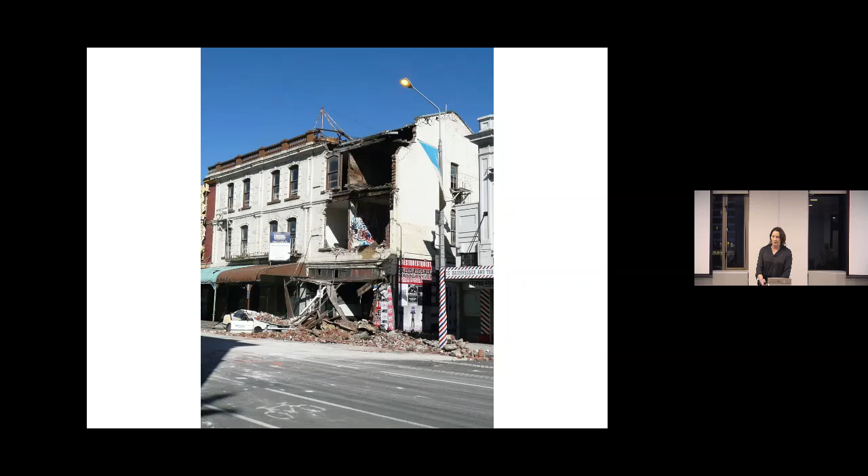When it stopped, my husband, fellow structural engineer, who some of you may know, Craig, his first words to me were, 'There will be buildings down.' As it turned out, the city fared well, and somehow, despite numerous near misses, there were no fatalities.

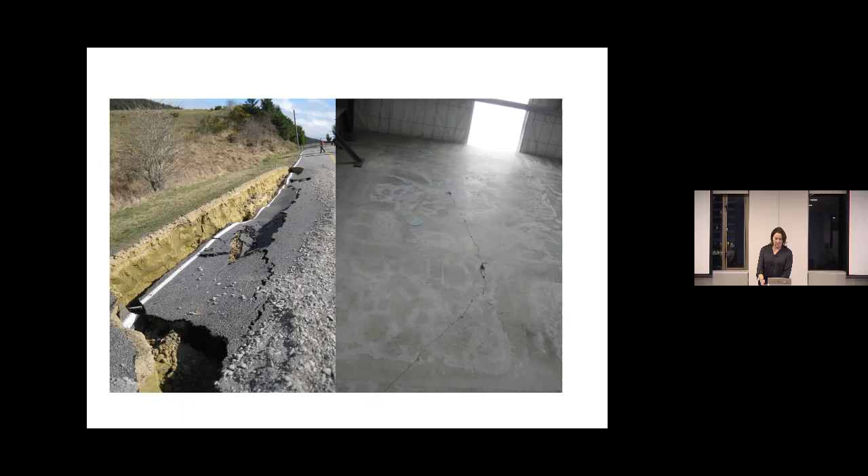I worked on secondment for the Selwyn District Council. I was responsible for the rapid safety assessment of a variety of buildings, including schools, community halls, pubs, shops, industrial buildings, a youth jail, and numerous residential properties, including this house, which was on Telegraph Road. It had the main fault rupture running through the middle of it. You can see it there. It went in the front door and out the back door. And it did pretty well.

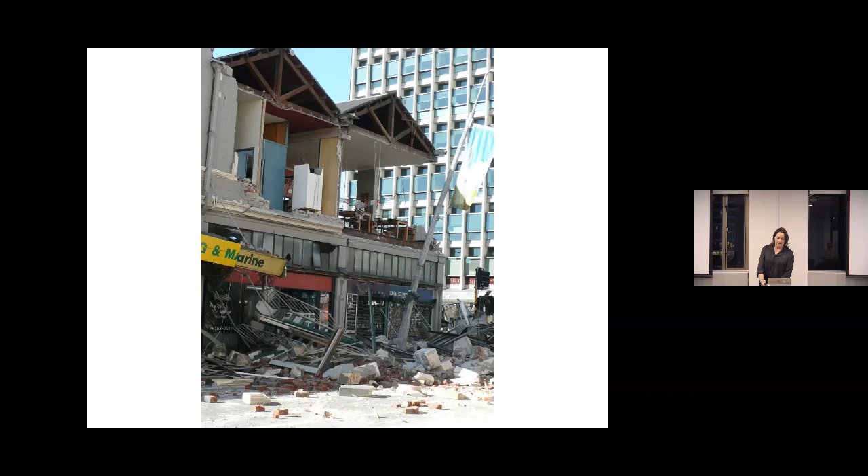Over the following 5 months, engineers were extremely busy, including some of you folk from up north, inspecting buildings and reporting on damaged commercial and residential buildings. The CBD had a large number of 2 to 5 storey unreinforced masonry buildings occupied by offices, retail and hospitality tenancies, only some of which had been seismically secured.

A handful were demolished, some were cordoned off, and some were unfortunately still occupied. I wrote a letter to the editor of the press in October 2010, encouraging people to seismically strengthen unreinforced masonry buildings, to secure their furniture and to get rid of their chimneys, getting ready for future earthquakes.

There was a growing sense of unease in the engineering fraternity as the aftershocks started occurring well away from the main fault line, including most significantly the magnitude 4.9 Boxing Day 2010 aftershock, which was centred under the centre of Christchurch.

At 12:51 p.m. on February the 22nd, 2011, Christchurch suffered an extremely violent magnitude 6.2 earthquake that was only 5 kilometres in depth and very near the CBD. It resulted in the tragic loss of 185 lives.

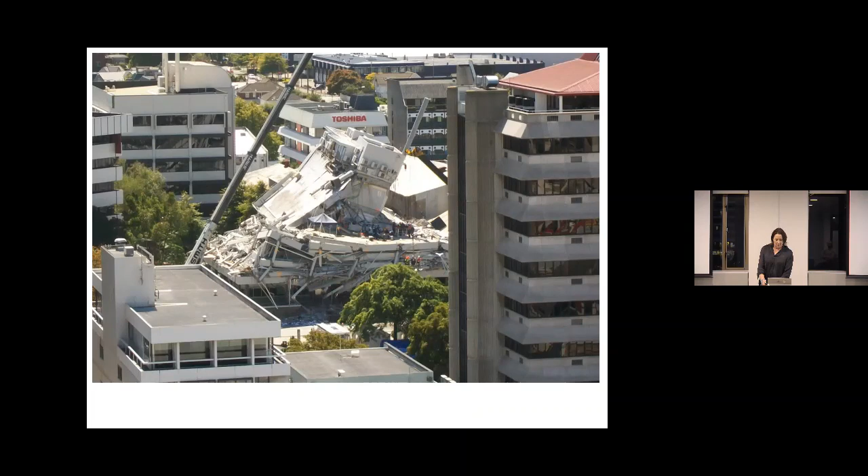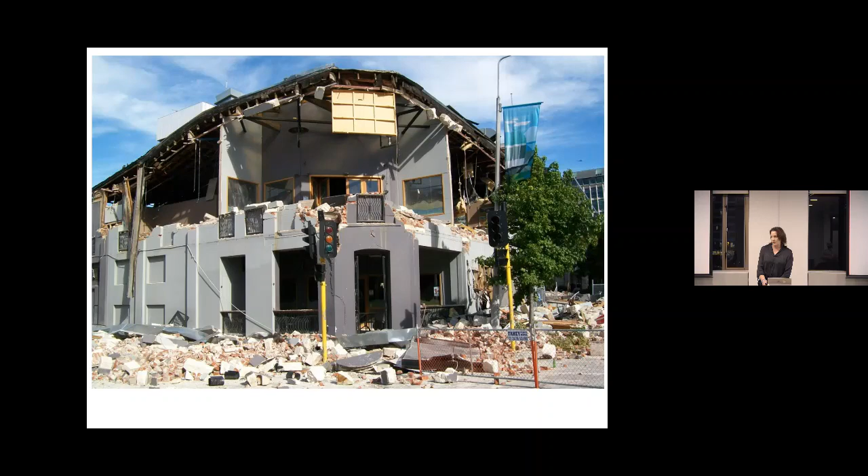Nearly 80% of the buildings in the CBD were eventually demolished. Some because they were uneconomic to repair, others due to generous insurance policies, and some were compulsorily acquired by central government and demolished to suit the new Christchurch rebuild blueprint.

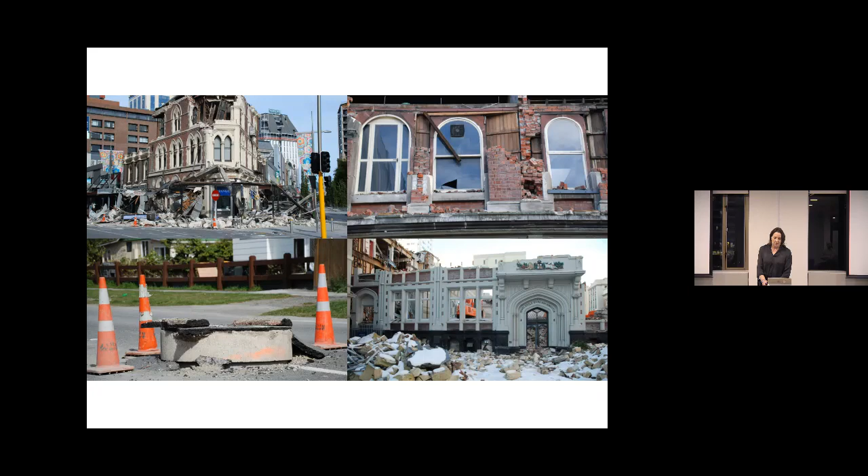The seismic design standards were primarily focused on life safety at ultimate limit state, and rightly so. Ductility in structures dissipates seismic energy, however, it also translates to damage.

With two tragic exceptions, nearly all of the modern buildings in Christchurch did what they were designed to do. In the February earthquake, they preserved life safety.

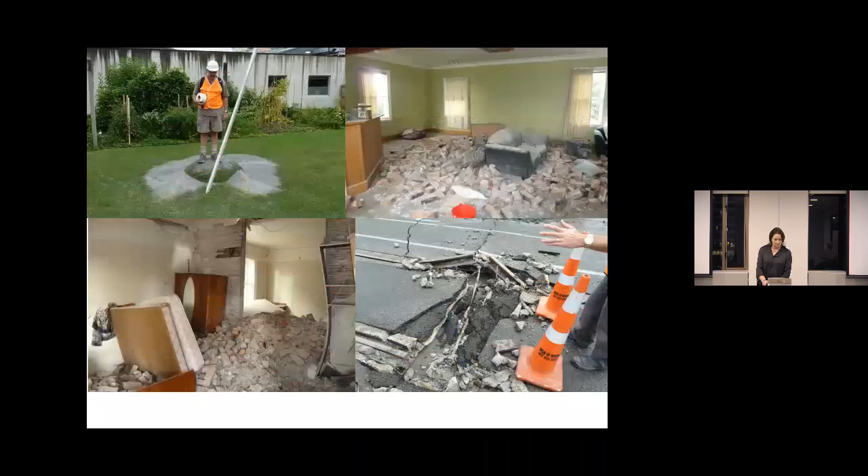Unfortunately, many structures needed to be demolished due to the extent of damage that they suffered. The benefits of being able to save an earthquake damaged building are wide-ranging. It makes economic sense, it saves time, and it's obviously got heritage and environmental benefits. That's my husband Craig there on the sand boil.

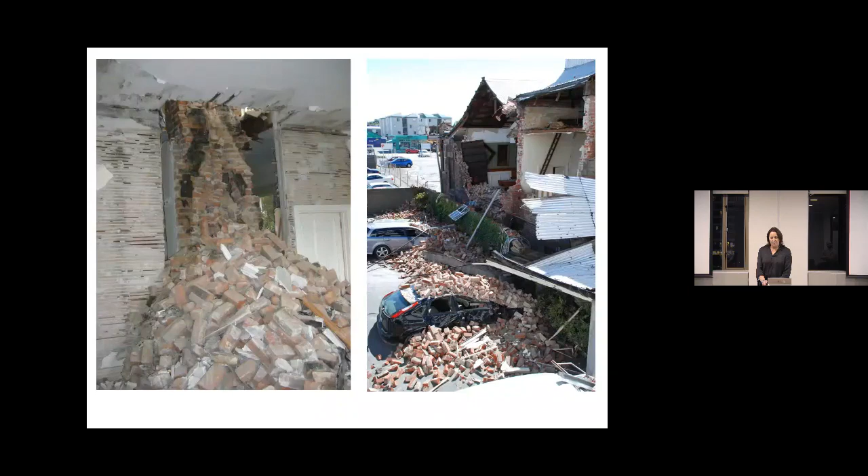I'm going to talk about 5 buildings that were not demolished, but easily could have been. The first of which is Ronald McDonald House.

It's a home away from home for families with sick children being treated down the road at Christchurch Hospital. I was the design engineer for the building in 2002, and it was extended in 2010.

It is a concrete structure, with concrete shear walls, concrete floors, concrete gravity frames, and a basement that is 2 metres in the ground.

It has 3 suspended levels, and the basement slab was designed for seasonal fluctuation of the water table, with standpipes designed so that if the water table rose slowly, the basement would be flooded and the buoyancy pressures would be reacted by the water pushing down on the slab.

Following the September earthquake, the building sustained only cosmetic damage and was able to continue operation.

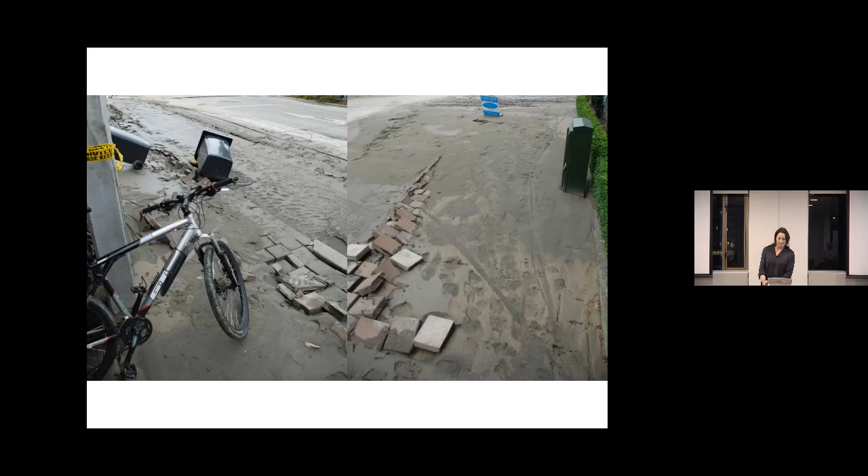The February 22nd earthquake was shallow, and although relatively short in duration, the shaking was extremely violent, and there was widespread liquefaction across Canterbury. The water table effectively rose to ground level instantaneously.

When Craig met with the head trustee of Ronald McDonald House and the original site foreman to inspect the building after the February earthquake, the builder was in tears. He thought the building needed to be demolished because the perimeter had settled.

Craig had a hunch that what had actually happened was hydraulic upheaval due to the rapid water table rise. This was confirmed by a level survey. The basement slab and internal gravity columns had actually been pushed upwards 80 millimetres.

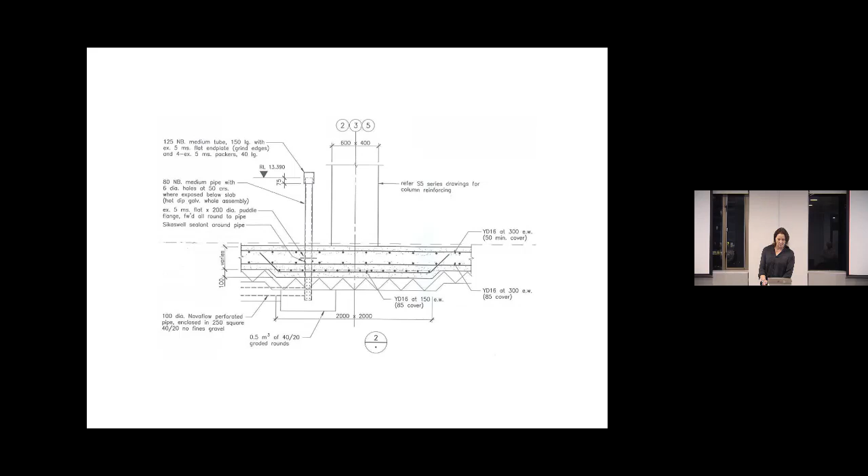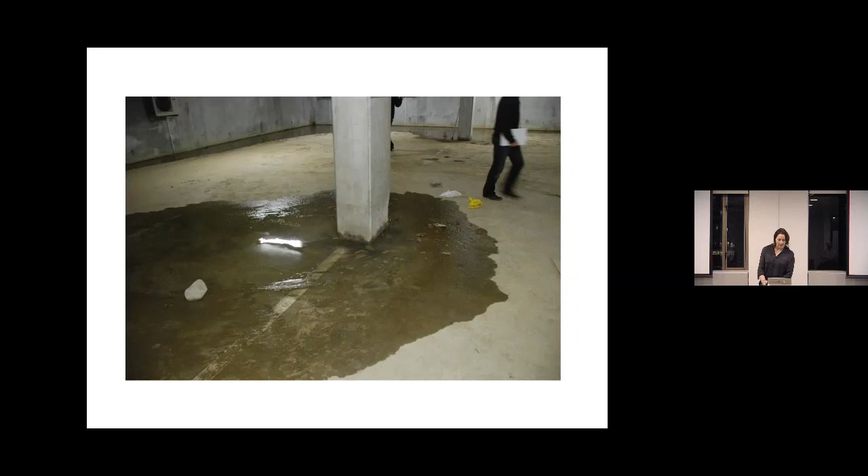You can also see evidence here of punching shear failure from the February earthquake. Water was coming up through the crack that Craig had just had his finger in moments beforehand. So the 300 millimetre thick basement slab had actually punched up.

The interesting thing about Ronald McDonald House is that they were self-insured internationally, so they were highly motivated to get the building fixed so that it could be up and running as soon as possible.

Commencing in December 2011, the repair work began on site. We were still experiencing aftershocks very frequently at this stage, so particular care needed to be given to the temporary works design.

What was done was that the internal gravity frames were propped and the basement slab and the columns were demolished. The internal gravity frames were then gently lowered back down until people upstairs could open and shut the doors again, and a level survey showed that it was level again.

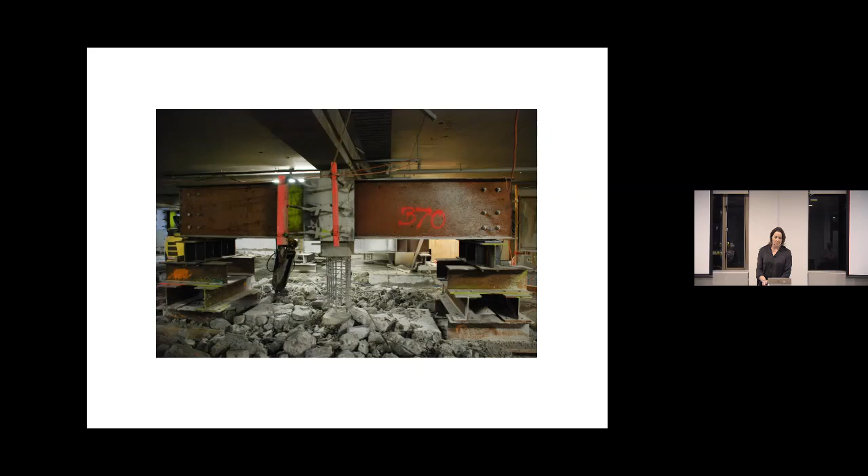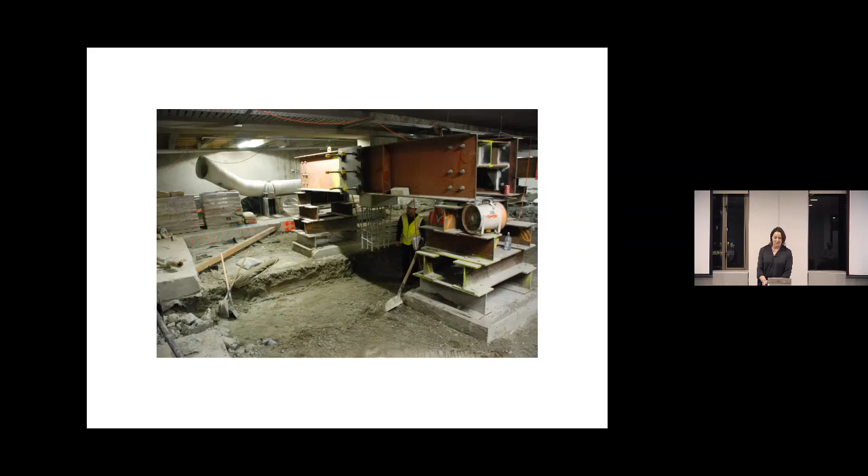Tension anchors were installed in the basement so that the slab would be held down, and a replacement slab was cast along with new columns in the basement.

The success of this project really was that it was completed in only 10 months, and it saved a significant amount of money in terms of not having to rebuild it. The great thing was that the families of the sick children could get back in there a year after the earthquake.

Now, you may recognise this hotel from the news today. It's where the Chiefs stayed on the weekend after they lost to the Crusaders. It's a 14-storey hotel, comprising a basement car park, 3 levels of retail and back of house, and 11 levels of a 4-star hotel on top.

It was constructed between 2008 and 2010 on a challenging site, and at the time of the February earthquake, it was the newest hotel in Christchurch.

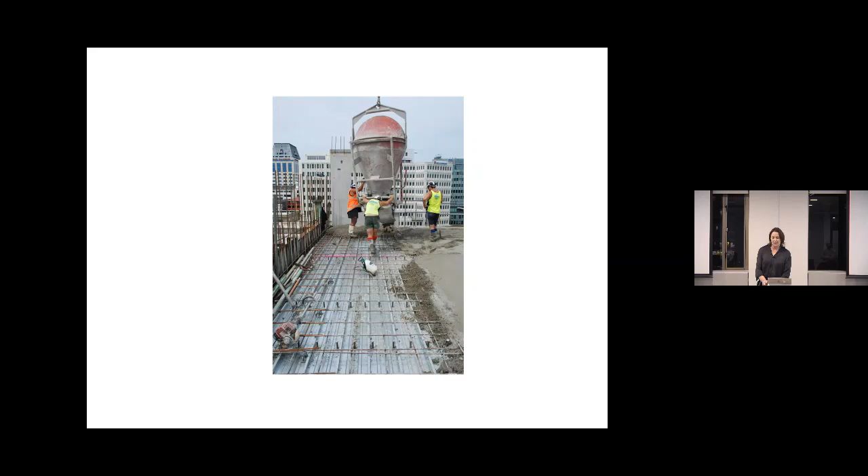The construction consists of an in situ concrete basement, including tension screw piles, a combination of precast and in situ primary shear walls. It has a structural steel gravity frame and tray deck flooring, and it also has precast cladding panels.

This is my sophisticated overview of the seismic structure. We've got a large podium for the bottom 4 storeys, and then on top a tower, and it has 2 shear walls in each direction.

The walls were carefully designed to form plastic hinges about 500 millimetres above the level 4 podium level, so that the level 4 diaphragm wasn't affected.

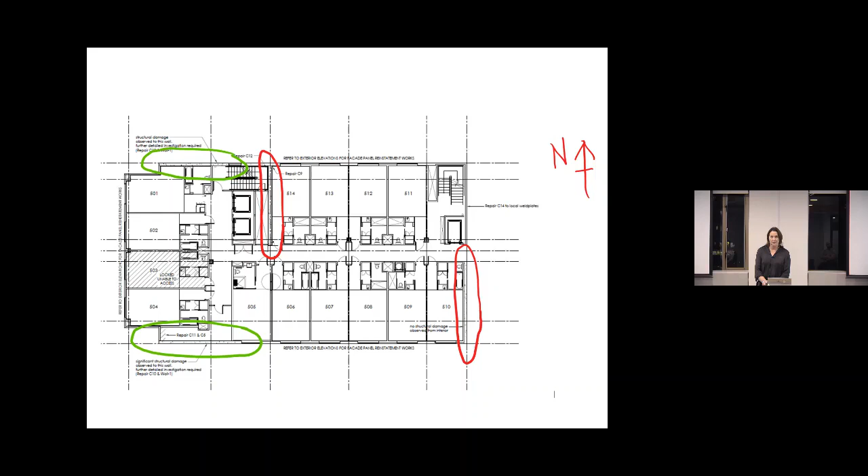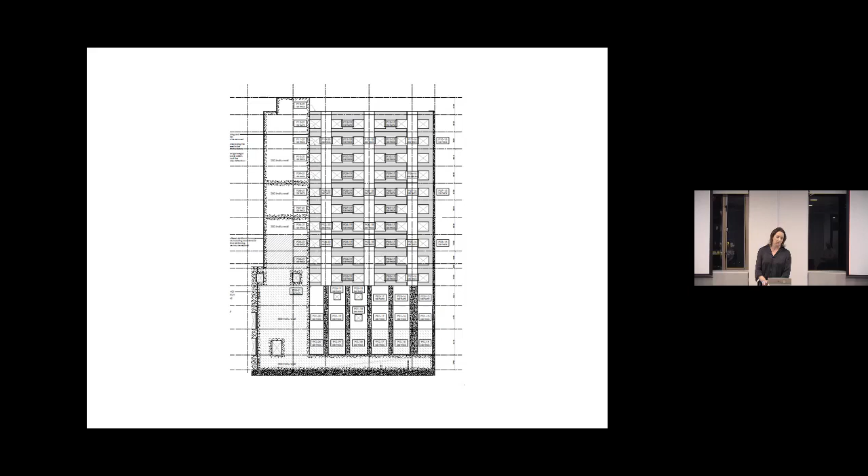It was detailed really carefully and conservatively using requirements for ductility level 6, but only with ductility level 3 loads. The plastic hinge zones have grade 300 vertical reinforcing in them. Everything else was then designed for the overstrength actions of the plastic hinge zones.

And this is what we got on February the 22nd. That's what you call a classic plastic hinge zone, and it formed on the southern shear wall. The northern shear wall was a little bit stiffer because it was a coupled structural wall, so it only suffered minor hairline cracks, and the resulting torsion caused some minor hairline cracking in the 2 north-south walls.

You can see here that the crack pattern was significantly from west to east, and an observation that we made was that it was from the initial nasty pulse of the earthquake. So you'll see that in Colombo Street and Manchester Street, a lot of the damage was on the west side of the road as the facades fell into the street with that initial pulse.

The 125mm thick precast cladding panels suffered spalling damage due to the shaking, causing deflections that were in excess of the design code level event. And the original cladding movement joints had, in some instances, inadvertently been solid dry packed, and some temporary steel brackets had been left in place, which exacerbated the damage.

So the cladding panels were progressively removed and replaced with top-hung floor-to-floor facade panels that incorporated enhanced movement joints at the base. The movement joints were designed for the full current code level requirements, including the post-earthquake increase in loads.

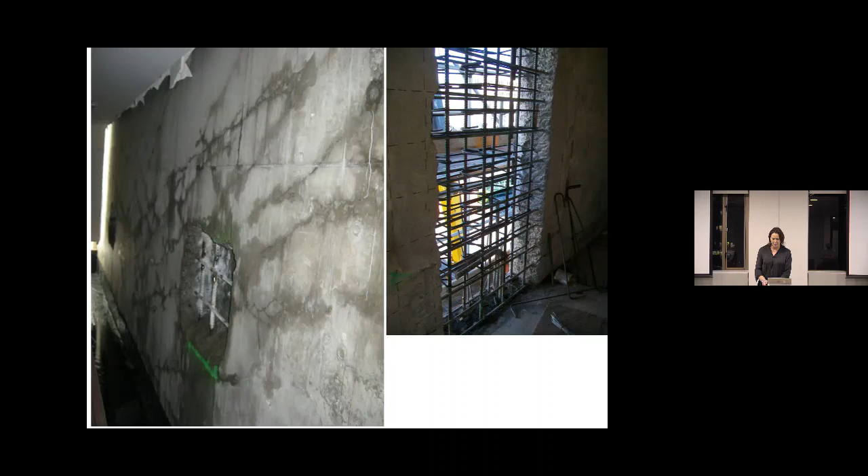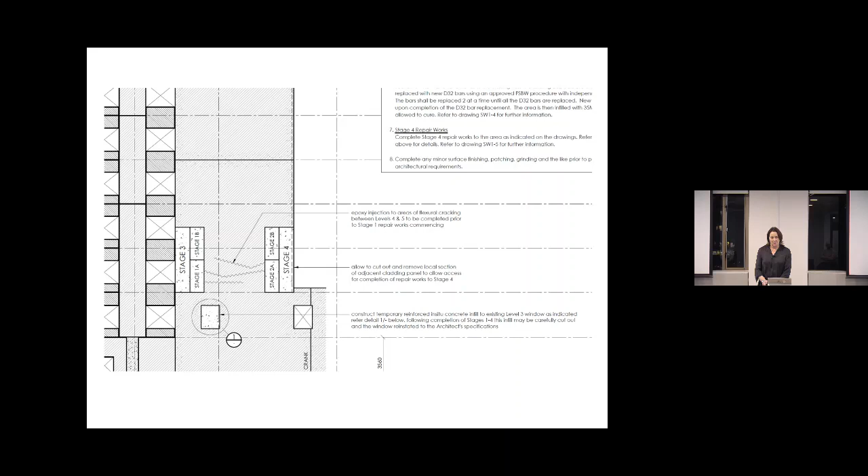Now, as you recall, this was done during the aftershock sequence, so the staging of the work had to be really carefully managed to ensure that adequate temporary strength was provided at all times, and that included infilling some other windows to always have sufficient strength at any stage of the construction. The first step was actually replacing the section of wall 1 metre away from the end of the walls to beef that up in terms of its ductility and confinement, and then the yielded end regions were replaced.

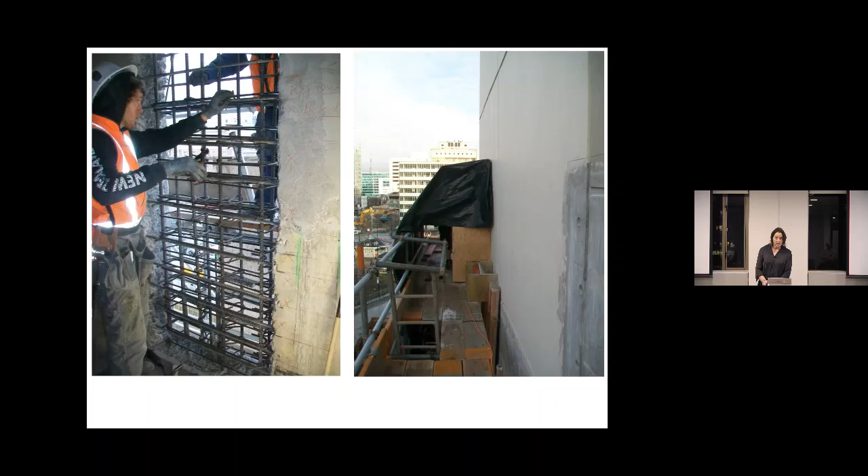We were really lucky because we had Professor Nigel Priestley review the shear wall repair, and he called on his extensive experience testing over 300 walls in his career and displacement-based design on the back of an envelope to determine that the repair work that we were carrying out was sufficiently conservative. And the hotel reopened in August 2013, which coincided with the red zone in the city being opened up.

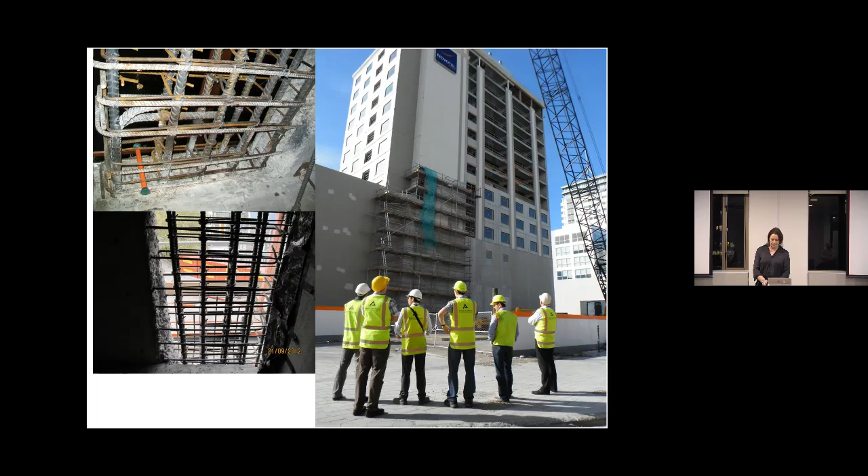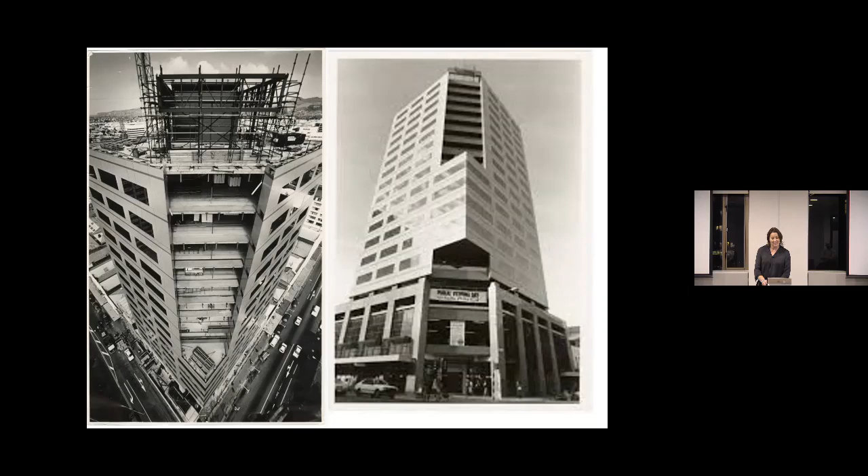The next building I'm going to talk about is the Forsyth Barr building, which was constructed in the late 1980s and named Robert Jones Tower. At the time, it was the second tallest structure in Christchurch, in the South Island actually, at 18 stories tall. It comprises in situ reinforced concrete frames, moment resisting frames in each direction, and a concrete rib and infill floor system. And it's founded on a 1.6 metre deep raft.

The lower 4 stories form a podium that was originally car parking and retail space. And when I was at university, my friend from Wellington used to call it Christchurch's CBD, or Central Business Building, since we weren't quite as metropolitan as Wellington. After 9/11, some of the tenants in the building stashed some climbing gear under their desks in case anything ever happened.

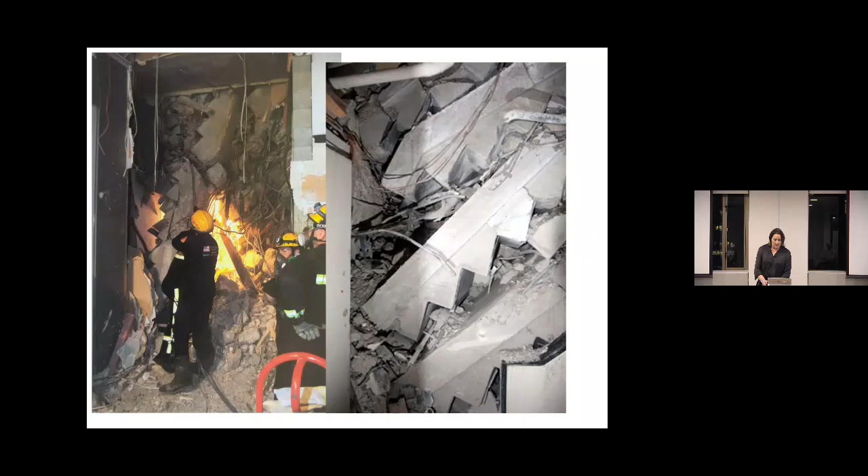In the February 22nd earthquake, you'll recall that the precast concrete stairs collapsed on one side up to level 13 and on the other up to level 15. The stair units were code compliant, and they'd been built floor to floor as single precast units with a mid-height landing, and they're tied in at the top and they were sliding at the base. It was later deduced that the stair collapse was caused by the seismic joints at the base of the stairs not having sufficient movement clear space, either because of the construction debris infilling the gaps or due to inadequate construction tolerances.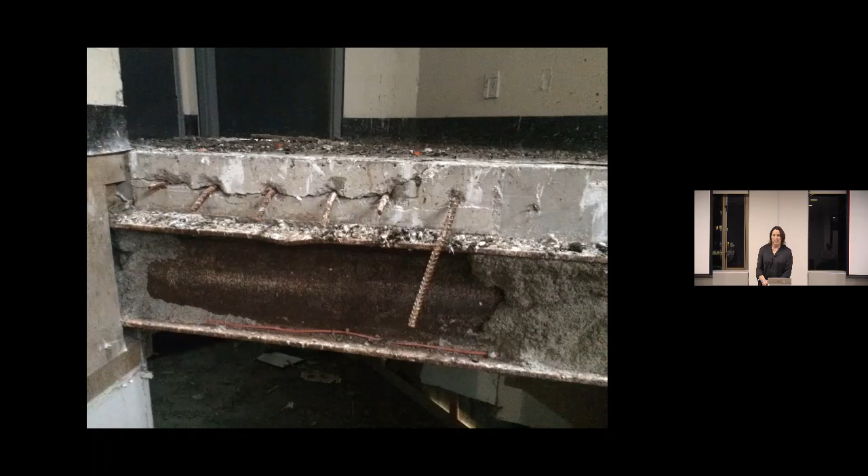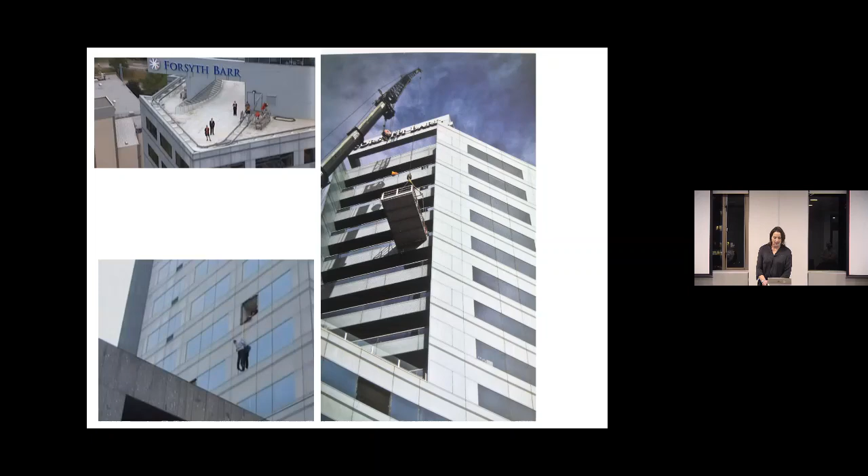In what became one of the iconic images of the day, some of the upper level tenants decided to use their emergency supplies to abseil out of the building and onto the podium. The first to go was Jay Moss, who now has the nickname medium-sized man because that's what they called out when they were looking for someone to volunteer.

Lewis Bradford were engaged in 2014 when the building was purchased as is, where is, in its earthquake damaged state. And the tower was extensively modelled and analysed, and physical investigations were carried out with testing done on concrete and reinforcing samples. And it's a testament to the original design by Holmes and construction by Fletchers, I think, that the tower frame was in really good condition and had performed really well. And it was also helpful for us that the natural period of translation for the tower appears to have coincided with a trough in the seismic hazard demands for both the 2010 and 2011 earthquake.

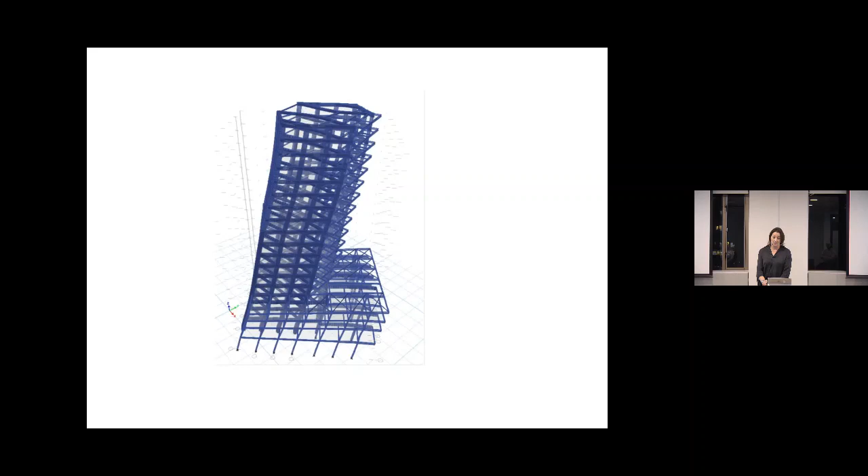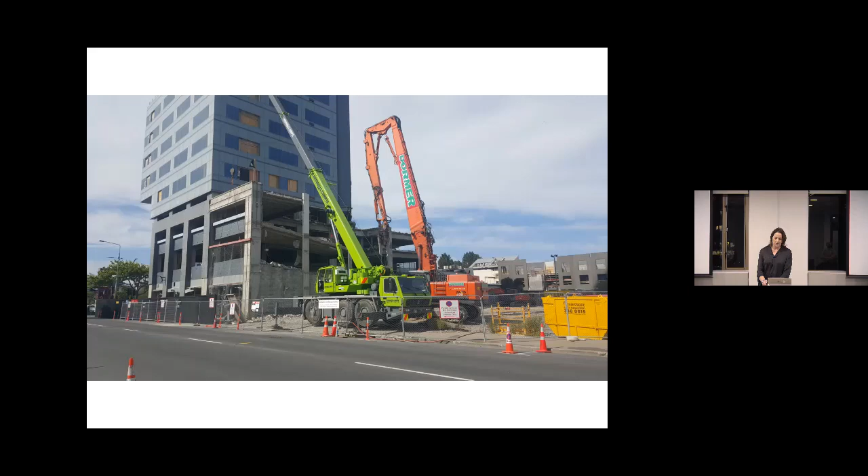So the building was to be converted to a hotel. So the podium was partially demolished and reconstructed to suit the removal of the car parking ramps. And a tricky part of our work was to redesign the stair, which was peer reviewed by about 25 million different engineering companies. Essentially, it's got a lot more sliding capacity at the base. The lower landings were extended, and it's now got the capacity to slide 500 millimeters, which is equivalent to the maximum credible earthquake event. Then there's debonded starters at the top, and there's been additional structural steel put in at the mid-height landing.

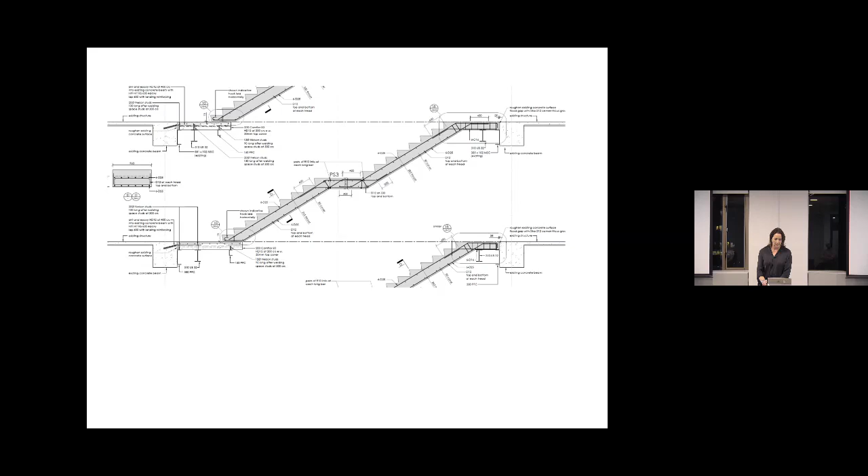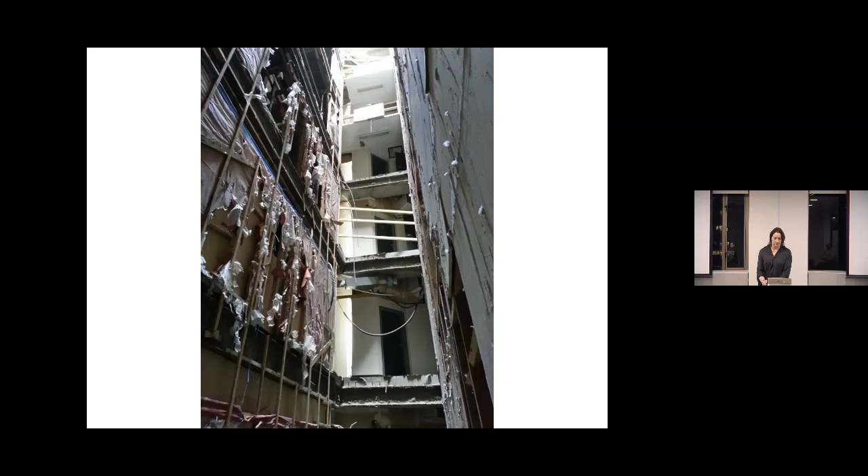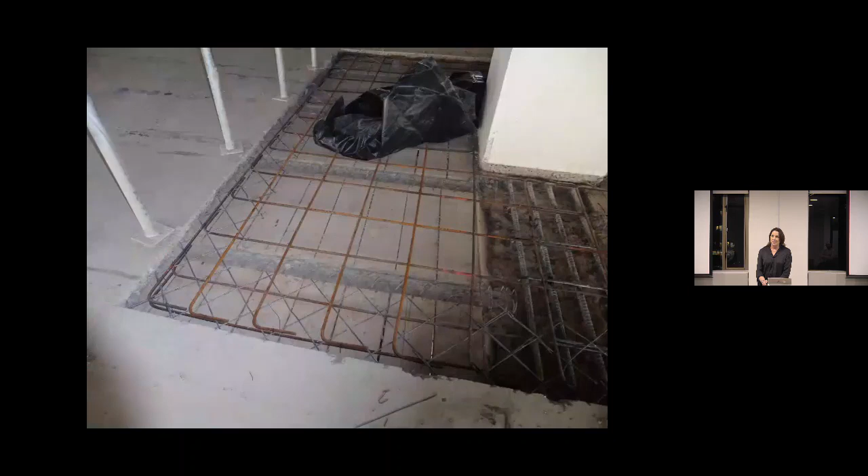Another challenge was actually building the stair, because it's not often that you need to construct a stair in an 18-storey tall open shaft. The refurbishment involved largely minor repairs to the actual tower. So some sections of the floor diaphragm, particularly around the moment frame columns, were damaged due to minor frame elongation of those perimeter frames. The floor reinforcing mesh was investigated and tested, and it was found not to have fractured, but it was enhanced with sections of greater reinforcing, and extra strut and tie members were added for additional diaphragm performance in the future.

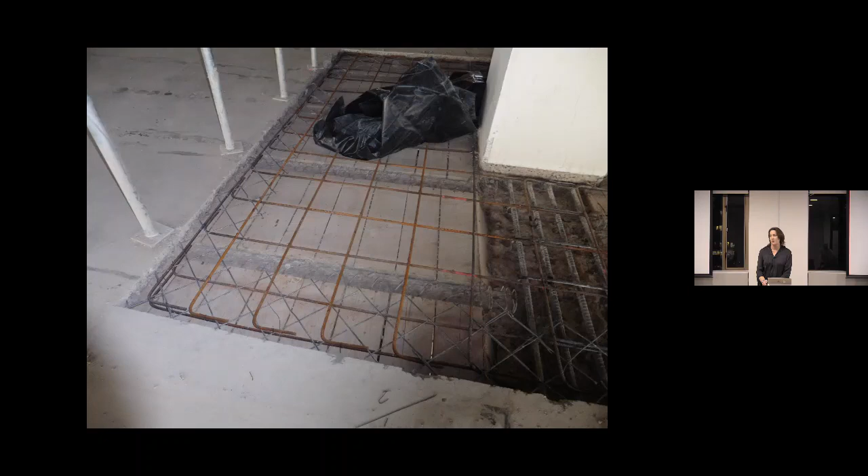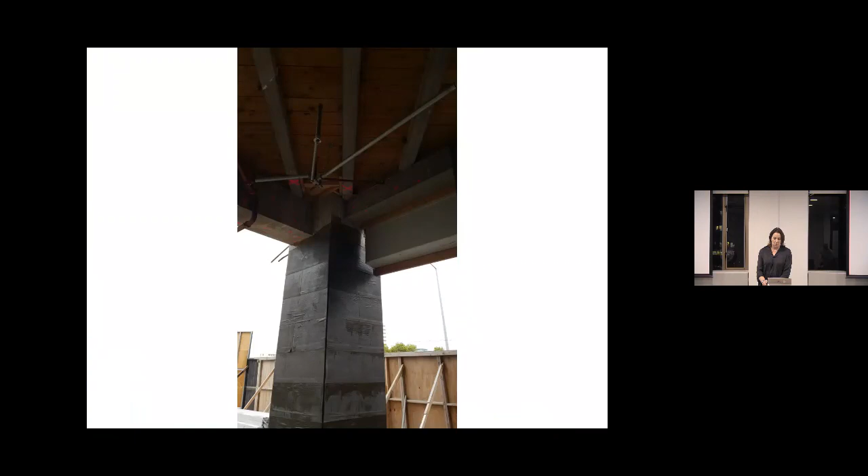Extensive crack injection was used to the floors, beams and columns. And some columns were enhanced with FRP wrapping. The critical southwest and northeast columns were extended with reinforced concrete in situ sections, because it was established that they had suffered some tension yielding over some levels. In 2017, the Crowne Plaza Hotel opened with 204 rooms, and it has a new 19th storey penthouse. And it's once again the second tallest structure in the South Island, since a couple of other ones have since been demolished.

So thirdly, I'm going to talk about 92 Lichfield Street, which is a heritage building, and it was built in 1893, designed by architects in Melbourne and built for a branch of warehousemen called Sargood, Son and Ewen. It traded continuously for 80 years until 1973, when it was subsequently occupied by a clothing manufacturer. Lewis Bradford were engaged in 2003 to carry out seismic strengthening on the building, and I was responsible for the detailed design work and construction monitoring of the project. When we first looked at the building, it would have been good for about 10% code in the west-east direction, because it essentially had no structure in that direction.

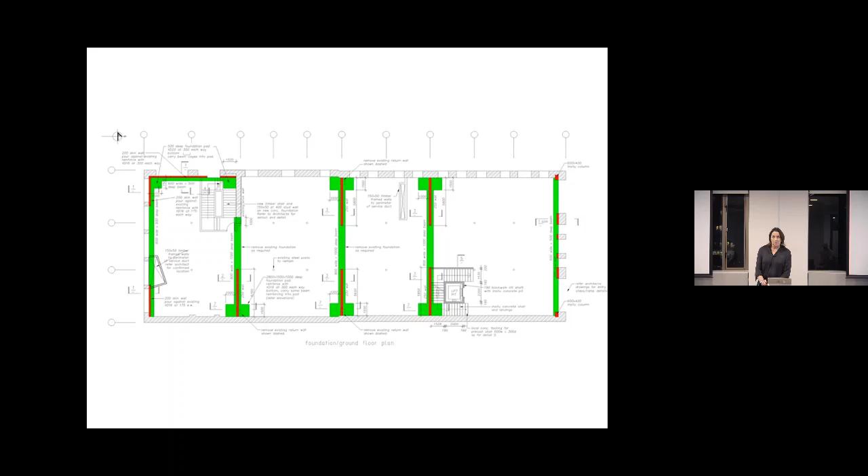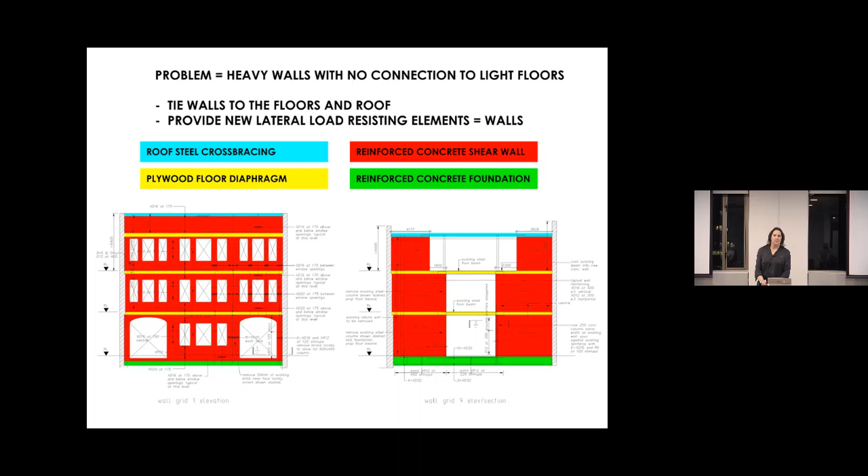So it's 50 metres long and it's 18 metres wide, and it's got unreinforced masonry walls to the perimeter, and it's got a timber framed first floor and second floor, with a floor to floor height of about 5 metres. So it's a beautiful old building, and an attic apartment was added as part of this refurbishment in 2004. Essentially what we did was add some west-east walls, which you can see up and down the page of that slide, and we tied all the heavy parts together. So there was extensive structural steelwork put in at roof level, and plywood floor diaphragms were put in at floor levels, and reinforced concrete walls in each direction, some of which were skin walls and some were just in situ internal walls. It's before the days of decent digital photography, sorry, so that's the only photos I could find of during construction monitoring.

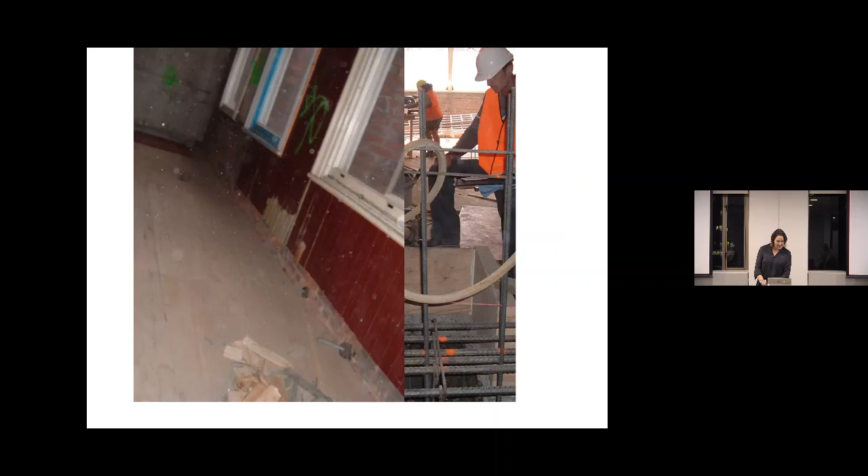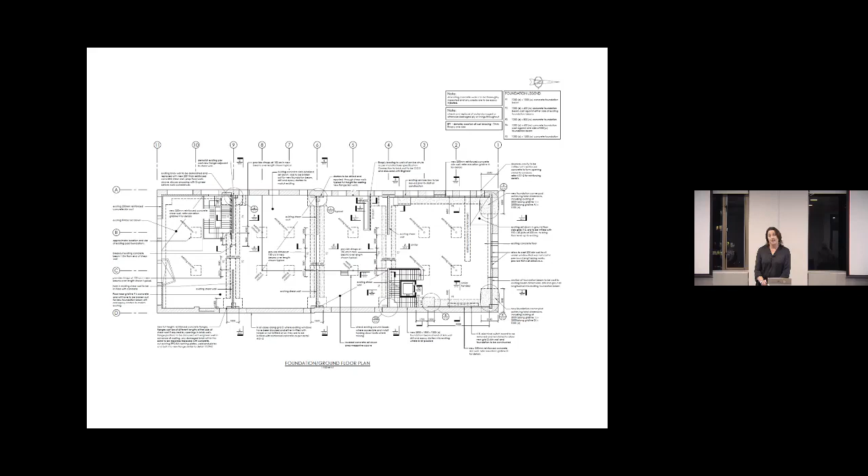It's been brought up to 80% NBS, which is of new code, so that incorporates an extra 36% increase from 2011. And the new strengthening work, which has been designed and consented, it's yet to actually be done, but it involves a whole lot of new elements. So more concrete walls, more foundations, and more diaphragm elements, new steelwork at roof level, and most significantly, to hold up the front facade, we've introduced a structural steel truss at the ceiling level of each level with anchor bars right through the northern facade, which already has a 200 thick skin wall on the inside of it.

And we're hoping that this will get underway soon. It's currently on Christchurch's Dirty 30 list of buildings which are sitting with containers in front of them, unfortunately.

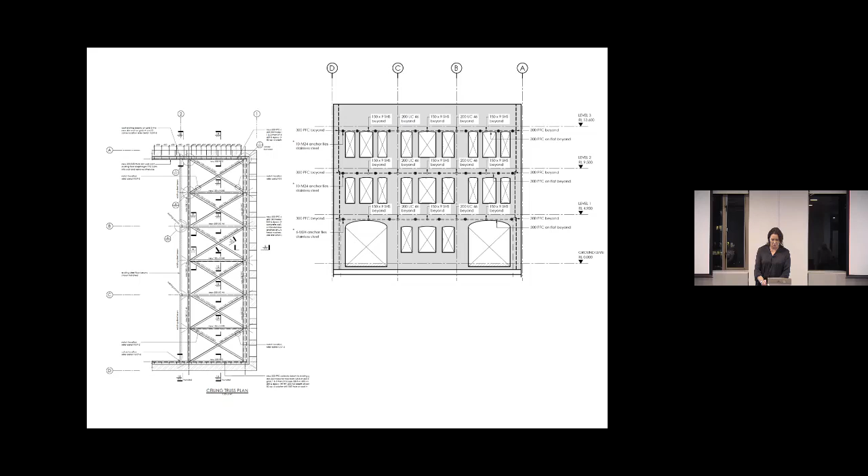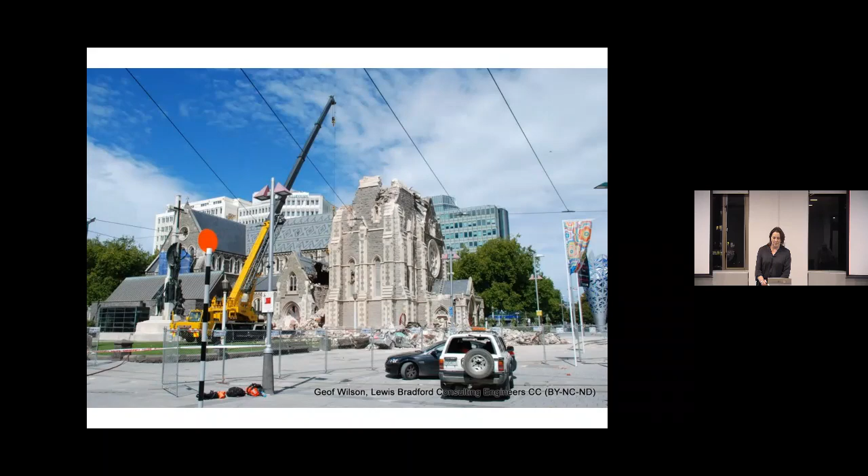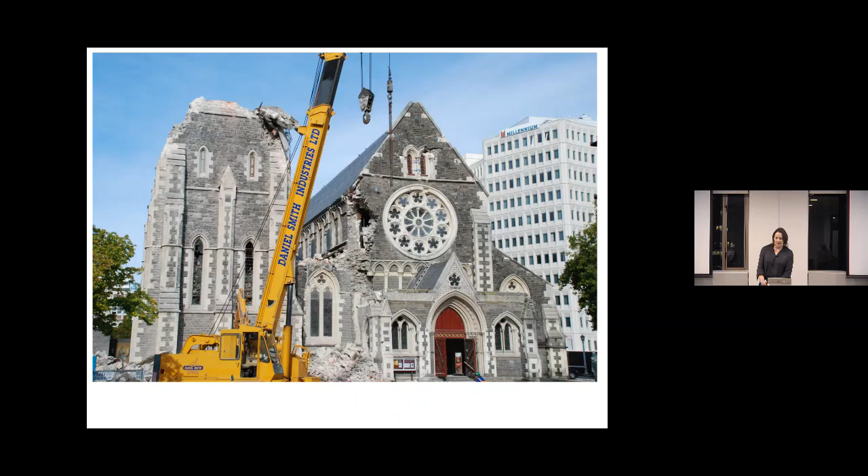Moving on to a building that is getting fixed, the Christchurch Cathedral is our most recognised symbol of Christchurch. And in the February 22nd earthquake, you will recall that the spire collapsed and the top of the tower. Fortunately, no one was hurt. In 2018, I was approached about the prospect of becoming a director on the joint venture company tasked with reinstating the building. I jumped at this chance, and it's been a once-in-a-lifetime opportunity.

Other board members include an investment banker, a lawyer, and 2 contractors, and they all have far more governance experience than me, so it's been a steep learning curve. And as an aside, I'd encourage engineers to consider governance roles on special construction projects, because it really is an excellent way to contribute, and we have good technical skills that are quite useful around the board table.

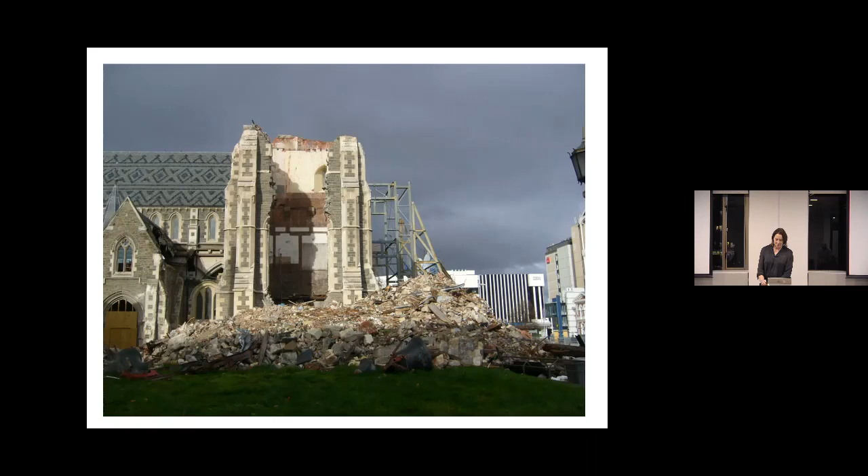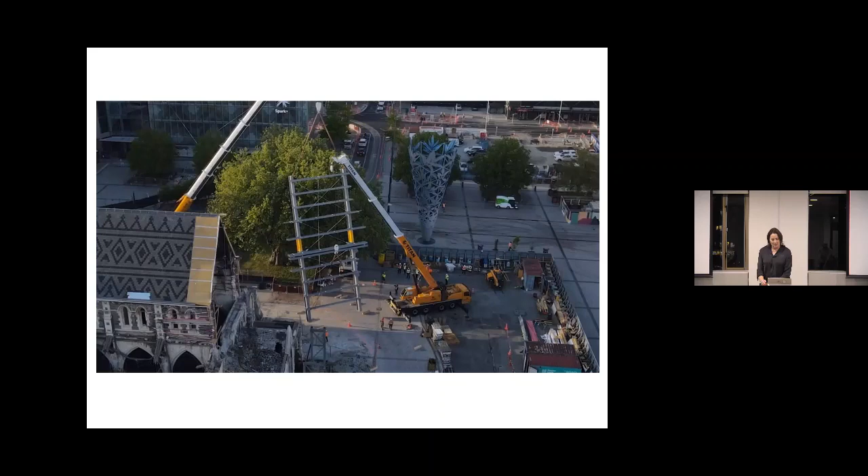The joint venture company has been set up between the Anglican CPT, the Church Property Trustees, and the Reinstatement Trust, which is the fundraising body set up by the government. And our joint venture company had to be set up from scratch. So that included finding offices, setting up banking, accounting systems, getting insurance, employing staff, then engaging consultants. So we have Holmes Consulting doing the structural engineering on the project, and they've had a lot of input from Naylor Love as early contractor involvement, which has been really useful.

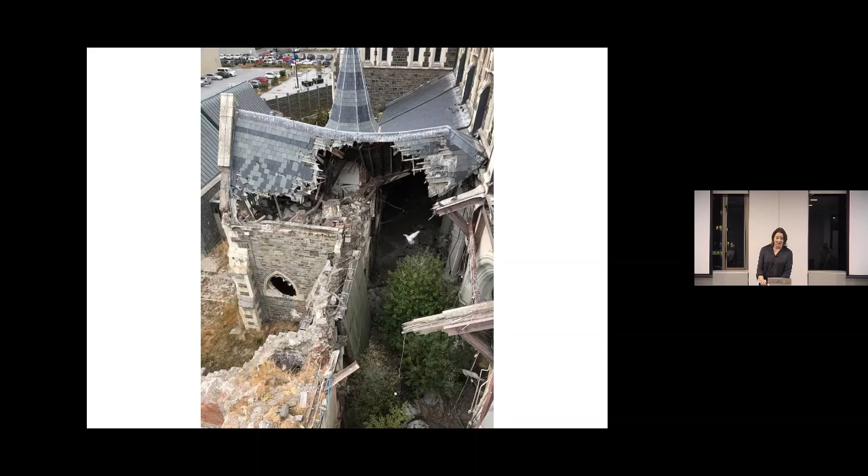So the challenges of the project are numerous, as you can imagine. So we've got an ongoing seismic period, we've got an earthquake damaged building, we've got pigeon poo to deal with, asbestos, stagnant water, we've got resource consents to get, and we need to try and preserve as much of the heritage fabric as we can within reason, economically. It's all pretty tricky, but great progress has been made.

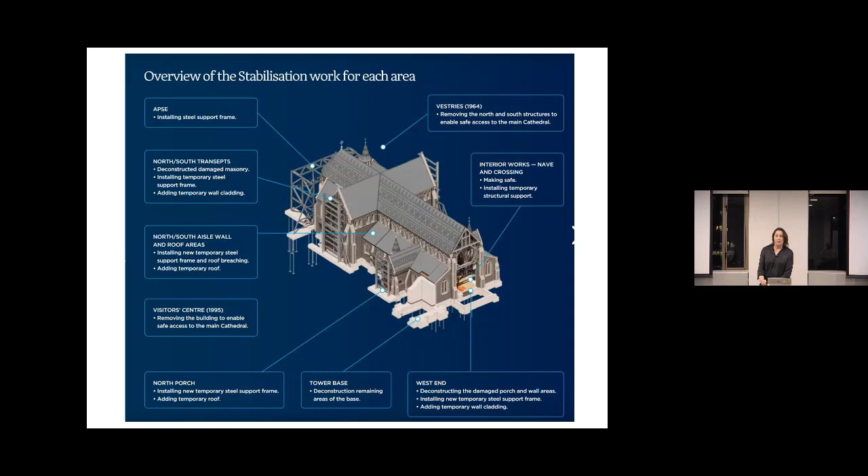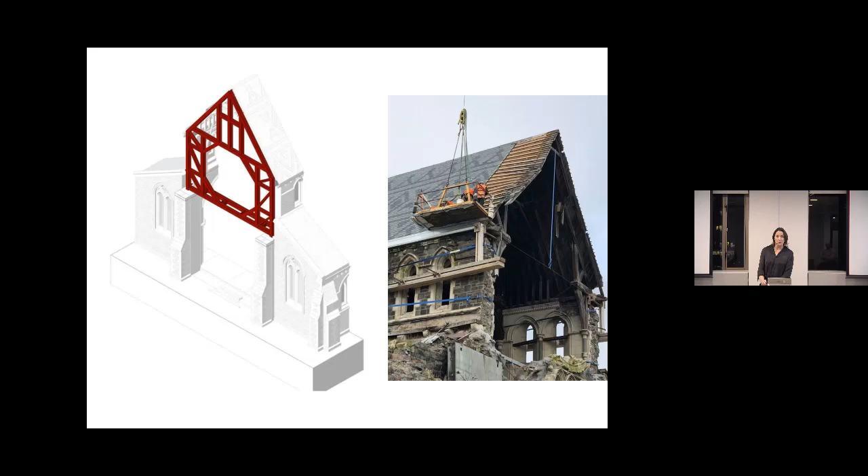The stabilisation phase is underway, and so the aim is to get the building up to 1/3 full code before anyone goes inside, so that it would be equivalent to any other building site, which mostly involves frames going up around the outside of the building. Some pieces of permanent strengthening work are going in as part of the stabilisation phase, including this new frame which went in last December for the rose window. And we've got a hoarding, which some people think when they look from down the road, they think we've made really, really good progress and finished the west wall, but you'll see it's just a photograph.

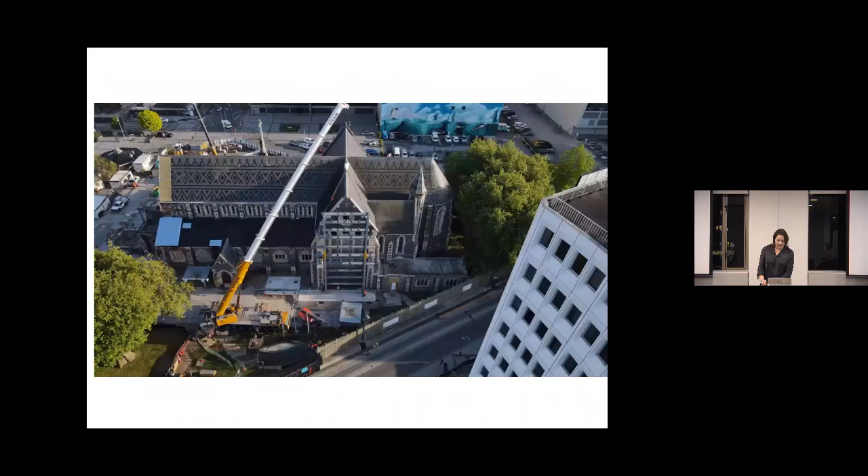And once the strengthening is completed, base isolation is going to be installed. So that's the really tricky part in terms of retrofitting that in. And the benefit of base isolation is to reduce the accelerations down to about 30% of the full code level. The tower will be rebuilt to look pretty much like it did beforehand, with some improvements, including a lift inside, and the bells will be reconfigured to perform better.

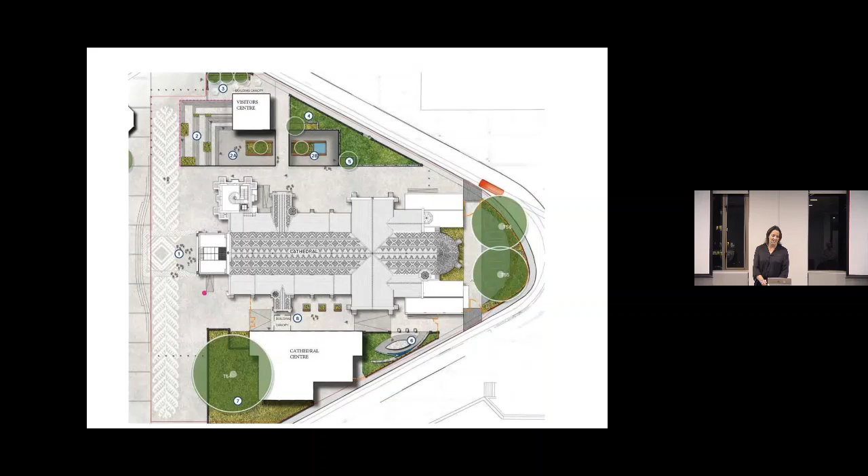And then there's also going to be 2 extra buildings built, one to the north and one to the south. And that's to really bring the cathedral up to modern day standards in terms of functionality. And they have been designed to be contemporary, but to complement the cathedral and not steal the show. So you'll see a sunken courtyard is planned, which is a pretty tricky undertaking, but the aim there is to get as much of the space down below ground level as possible. So it'll look pretty much like it did before, hopefully.

So moving on, a decade on from the earthquake sequence, it's easy to forget the significance, the impact it had on everyone who was there. We had 20,000 aftershocks, and I think we've all got post-traumatic stress disorder to some extent or other, whether it's a car alarm that goes off that freaks people out or hearing a helicopter. And whole suburbs of Christchurch were written off, and often that wasn't because the houses were damaged, it was that the infrastructure was too expensive to repair and the government red zoned it.

Coupled with that, many businesses ended up signing up to 8-year leases out in the suburbs.

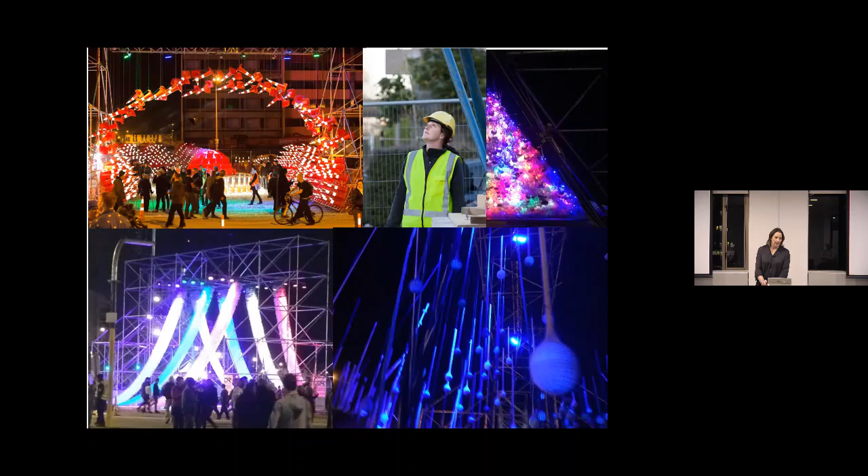To try to help bring life back to the city, Lewis Bradford got involved with a bunch of different things, including the Festival of Transitional Architecture from 2013 until its final year in 2018. We carried out pro bono engineering to help architecture students from New Zealand and Australia with large-scale installations that were put up for just one night only.

The festival encouraged the locals to come back into the CBD. For many of them, it was their first time coming back into the city because they had no other reason to come into the city.

You'll see in this photograph what's interesting is that there's no lights on in any of the other buildings. That was maybe the one building on the corner of High Street and Manchester there, but all the other buildings were not occupied at the time.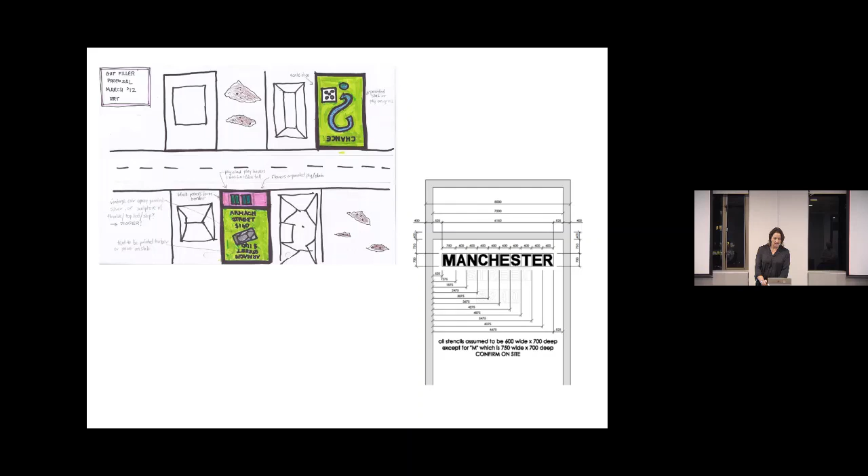Following on from that project, I wanted to do something that was a little bit more permanent to help. It really struck me that when you looked around the city, the things that stuck out were pieces of public art.

In 2012, I approached Neil Dawson, who you will hopefully recognise as a sculptor who's worked on lots of different projects around New Zealand and Australia, and asked him if he wanted to work on a new sculpture for Christchurch. I gave him an open brief that he could design whatever he liked, and what happened was he had designed Chalice in the square, and he had never thought it would be possible for the Chalice to still be there but not the cathedral spire.

So he tried to draw the cathedral spire and realised that he couldn't remember what it looked like, and that inspired him to design something based on the cathedral spire.

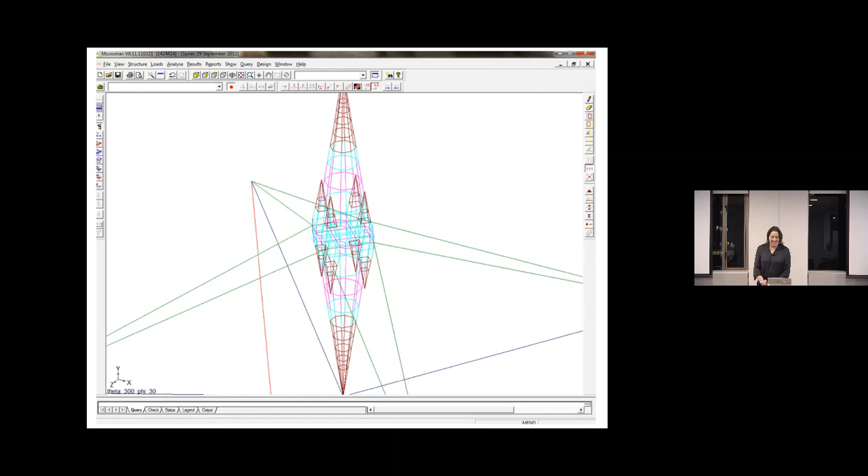I undertook the seismic, or more accurately the wind design, of the sculpture. And we roped in a whole lot of people from the industry to help us build it completely for free for Christchurch. So here's one of our drawings.

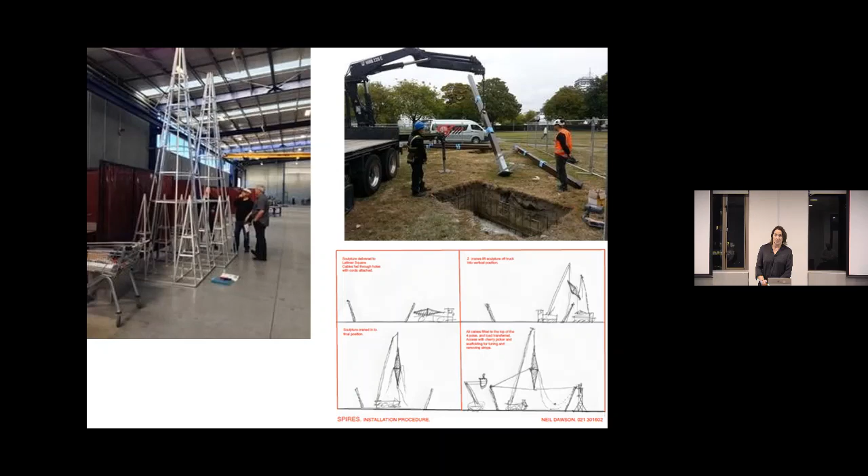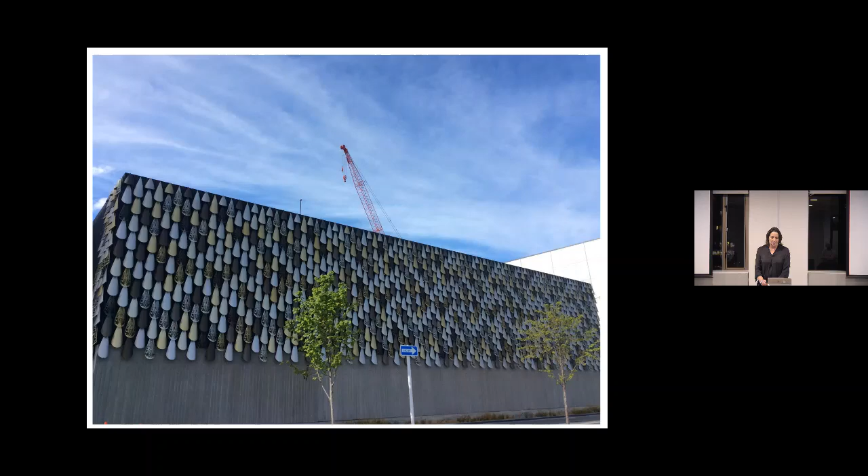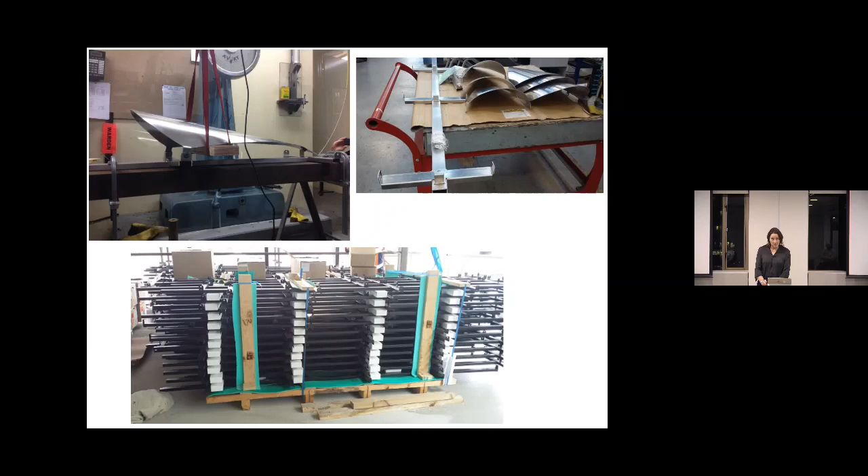Some other large-scale works that I've been involved with include Lonnie Hutchinson's Kakahu facade, which is on the new Justice Precinct. I was engaged by the contractor to help with the specific engineering design of the secondary steel to help support the facade. It's a bit tricky because it's made up of aluminium feathers.

Next, I'll talk about Call Me Snake, which is a 9-metre high steel structure clad in plywood.

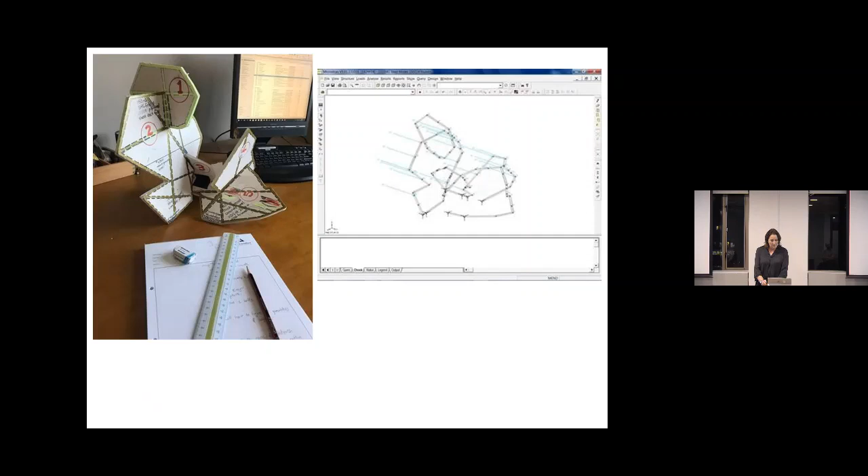Steel frames were constructed using a computer model. The artist gave me a model which I used for analysis, which was then handed on to the shop drawer who handed it on to the builders and surveyors for putting in the hold down bolts.

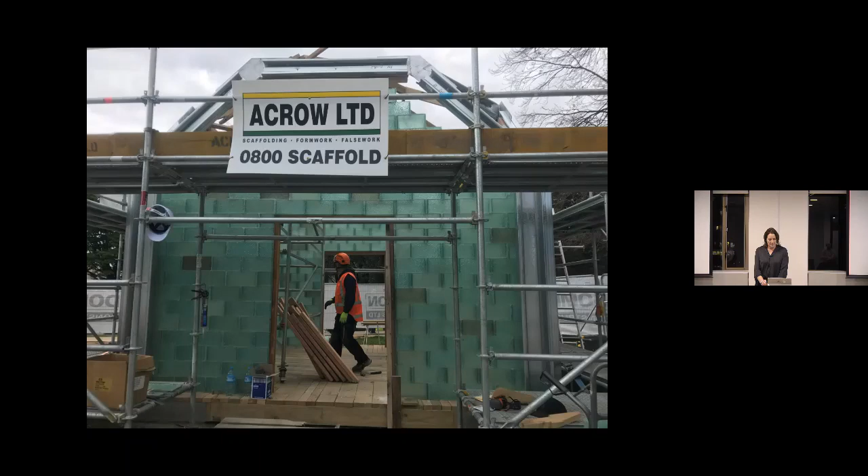Gregor Kregar's temporary work, called Glass Pavilion, was a tricky undertaking in a seismic area. He constructs his own glass bricks and then puts neon lights inside them. So we had to hide some structure inside his pavilion, which we did with a portal frame, which was up for about 6 weeks over the summer a couple of years ago.

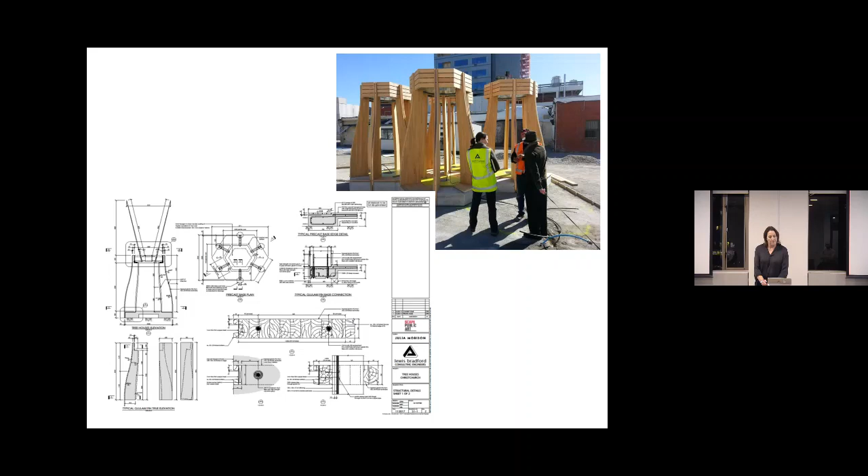This is Tree Houses for Swamp Dwellers by Julia Morrison, and it's a macrocarpa series of planter boxes which have lighting rods poking out the top, and they have ferns that grow up around the fishing poles that we used, and they've since been shifted down by the town hall.

In 2016, I helped Scape Public Art instigate a sculpture design competition for school students. So these are some of the winners over the years. We carry out the engineering design for them and help guide the students through the process of seeing their work come to life.

It's been a really rewarding project because it's exposing the students to both the world of art and the world of engineering. And it also helps them see the creative side of engineering.

And finally, I'll briefly explain the structural design of Tūranga, which was the winner of the iStructE Award a couple of years ago. It's a 5-storey building with a total floor area of 10,000 square metres. It was one of the main anchor projects redefining Christchurch following the earthquakes.

The success of it as a project should be judged against the backdrop of the earthquake sequence, which really highlighted that while the majority of buildings in Christchurch achieved the building code requirement of life safety, a great number needed to be demolished because they were uneconomic to repair. So we were looking for better seismic resilience in the design.

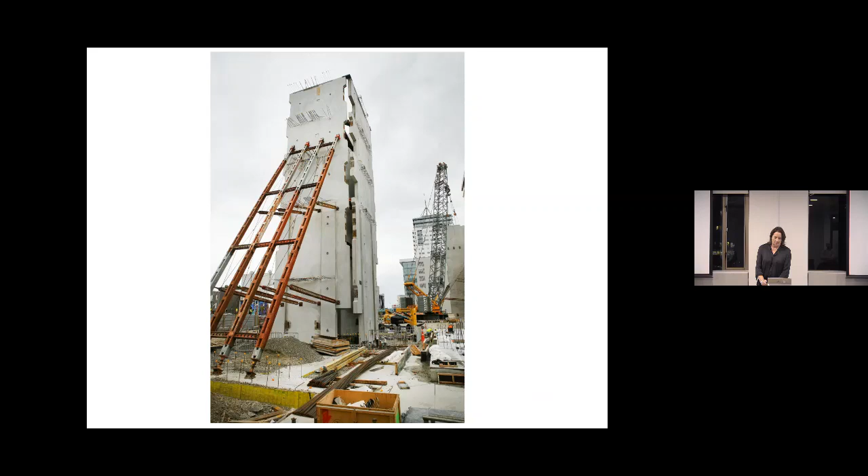A key feature of the structural design of Tūranga is the dual seismic resisting system, primarily consisting of an integrated self-centering mechanism in the form of hybrid concrete shear walls. They can rock to isolate the building from peak accelerations, and they work in conjunction with perimeter steel moment resisting frames which have rocking base connections.

Each rocking shear wall has high tensile post-tension steel cables that clamp the wall to the foundations, each with 1,000 tonnes of force per wall.

The controlled self-centering rocking is ensured by both the post-tension cables and seismic energy absorbing devices called high force to volume lead dampers, or HF2V dampers, which are attached to the base of the walls. There's also steel U-shaped flexural plates, UFPs, shown in that central photo, located at each end of the walls.

The term hybrid reflects that each rocking wall has a combination of hysteretic damping from the UFPs, debonded mild steel reinforcing starters at the base, and also the total system recentering force provided by the post tensioning located centrally. They have sufficient force to restore the walls and perimeter frames to their original position after a 1 in 1,000 year return period earthquake.

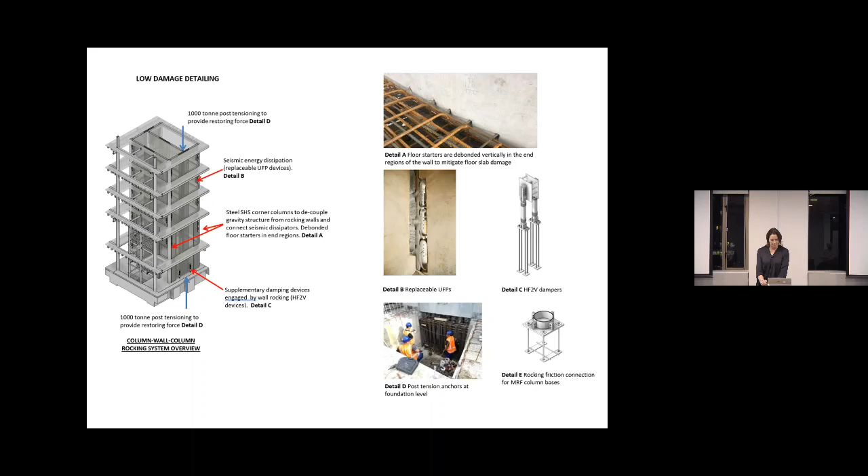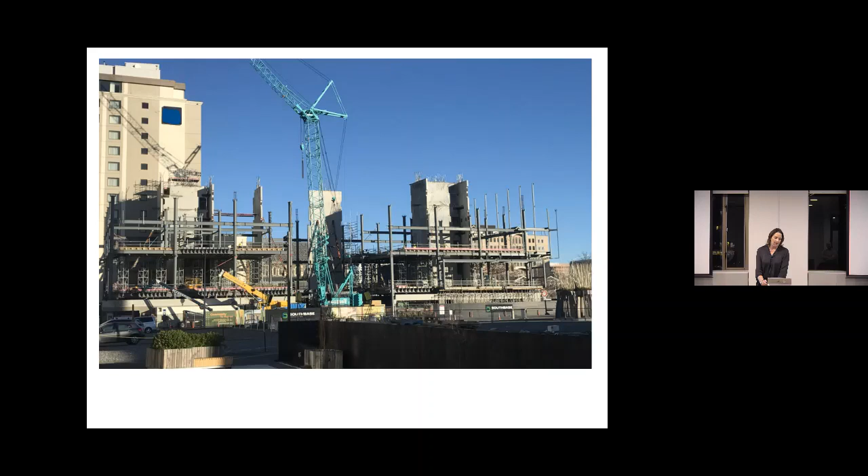So the combination of the dual system, the replaceable energy absorbing devices, and the self-centering mechanism of the building provides a seismically resilient structure. These are state-of-the-art systems which have been pioneered in New Zealand, and this involved a lot of collaboration with the University of Canterbury.

The hybrid walls are arranged into 3 main cores, providing approximately 75% of the seismic resisting system, while the moment resisting frame provides the other 25%. The walls were located such that the centre of strength, damping and restoring forces were all closely correlated to the centre of mass.

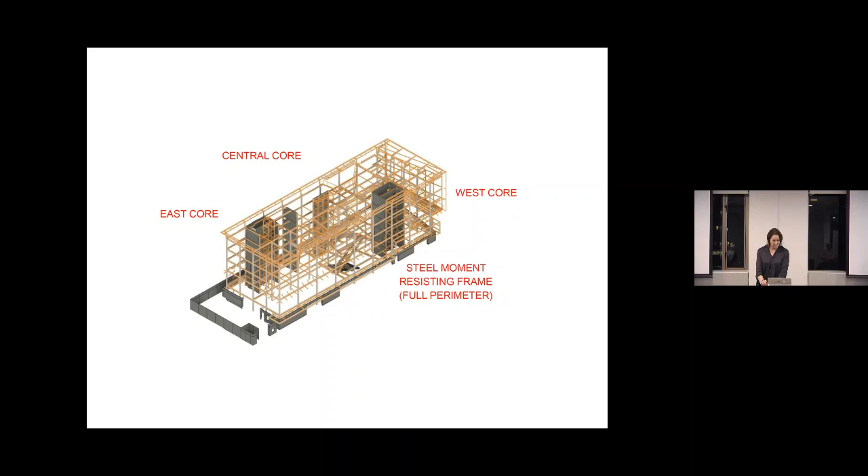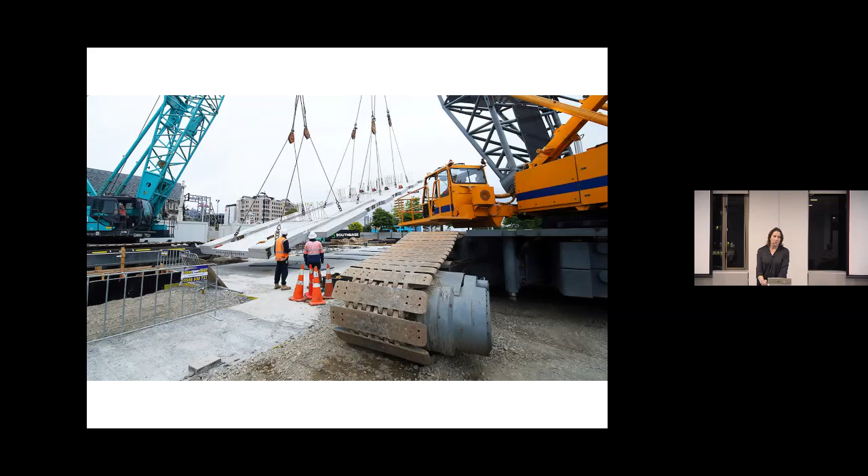They were cast on site full height, and some of the panels weighed almost 150 tonnes, making them amongst the biggest precast tilt panels ever constructed in the world. It was also a good health and safety result because it allowed the structure to be self-braced from an early stage in construction.

In conclusion, I hope I've provided a bit of a snapshot of the complex and painstaking work that has been undertaken in Christchurch over the last decade. I've showcased a number of community projects that I've worked on to help try and bring people back into the city, and indicated some of the modern low damage seismic technologies that have been utilised.